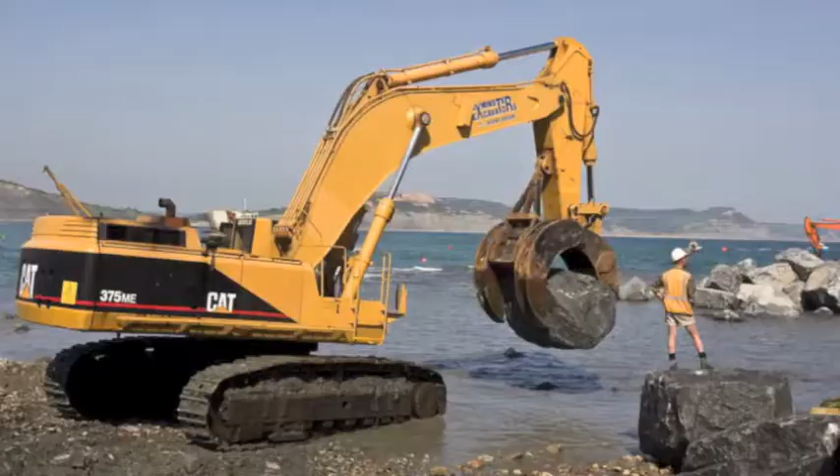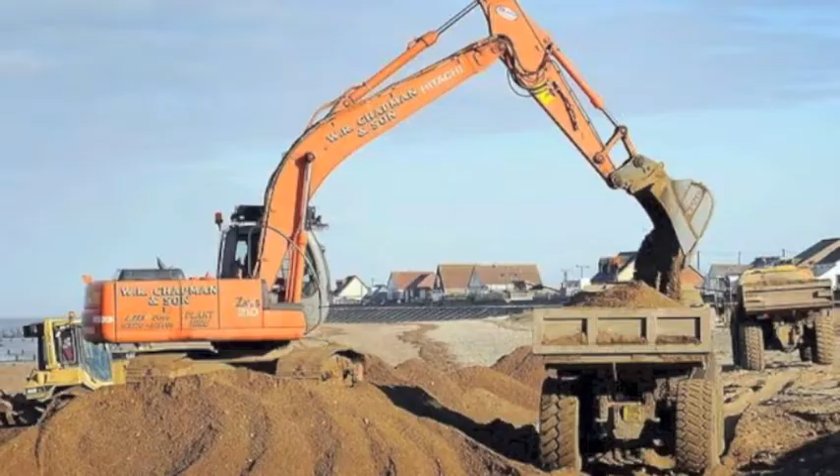Hello, we are Coastal Redevelopment Solutions, and this is our design concept video for the redevelopment of the Tropicana outdoor Lido. This video will look at what solution has been proposed, why this is needed, and how it is going to be accomplished. CRS is comprised of 6 engineers, 3 mechanical and 3 civil.

Together, we have over 3 years of industrial experience and over 20 years of academic study. The team is led by William Holloway, who is the chairman, Joe Driver, who is Vice Chair, George Wright, Finance Manager, Broden Yaxley, Aquatic Specialist, Benjamin Lomax, the Environmental Consultant, and Charles Sayer, Public Relations.

CRS provides a comprehensive design and project management service for coastal redevelopments. Our core value as a company is to provide innovative solutions to complex problems while maintaining an eco-friendly ethos. Through the establishment of strong relationships with clients and the use of our technical knowledge, CRS delivers design solutions which satisfy all project requirements. The Tropicana is located in the town of Weston-super-Mare, situated in the southwest of England.

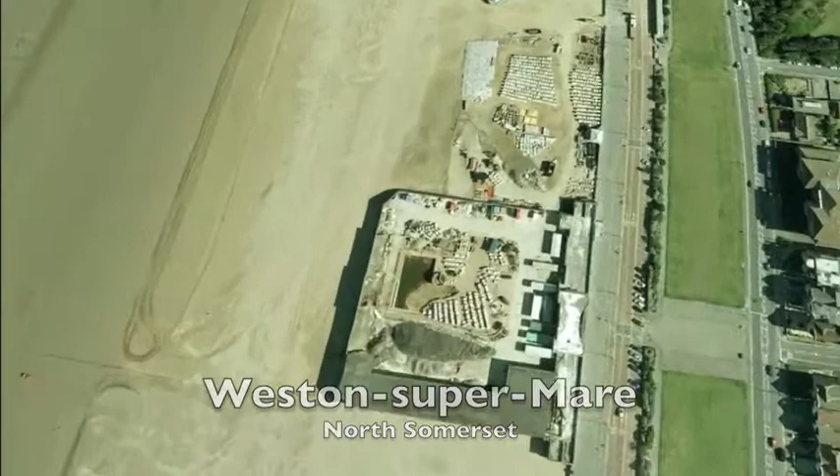The area has excellent transport links, being just off the M5 south of Bristol. Weston is a famous seaside resort which plays host to a range of events such as T4 on the beach, the Motocross Enduro, and the Powerboat Championships.

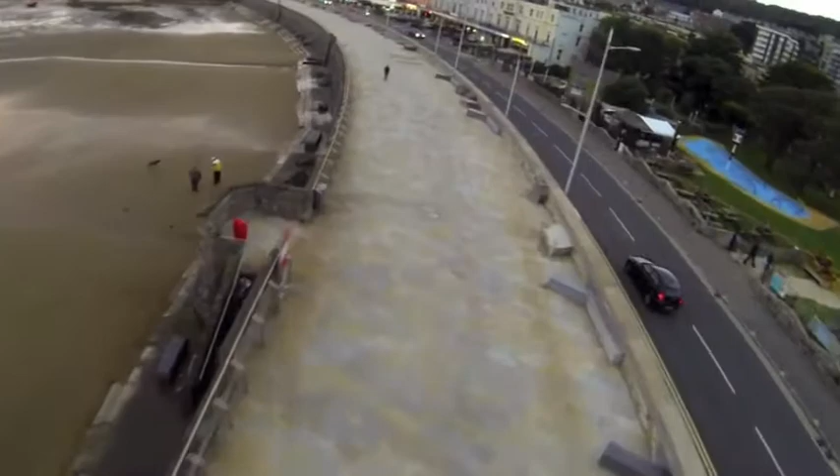In the last 10 years, Weston Seafront has undergone major redevelopment. This encompassed projects such as the £39 million rebuild of the Grand Pier after it was burnt down in 2008. The redevelopment of Knightstone Island Apartments, along with the new Children's Adventure Water Park area.

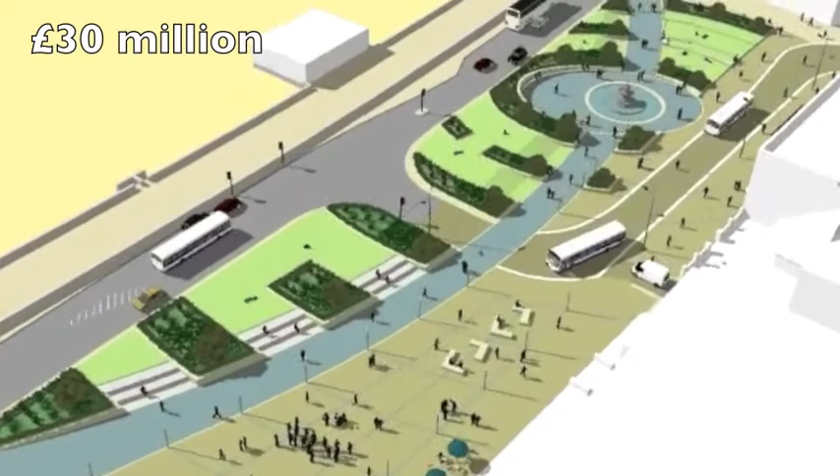The whole of the promenade has been renewed due to the threats of flooding. This £30 million project has refreshed the aesthetics of Weston and has promoted future redevelopment, such as the proposed Dolphin Square shopping area.

Due to the amount of money which has been invested in Weston, we believe that this is the perfect time for the Tropicana to be considered as a viable redevelopment project. There is strong support from the local community, with over 3,000 signatures, as well as a general consensus that something needs to be done. So what do the stakeholders say?

From the Council's perspective, the Tropicana needs to be developed. There have been previous attempts to regenerate the site, but none have been feasible due to the complexity of the proposed designs. The Tropicana was planned to be demolished in 2011, but fell through due to the objection from the people of Weston and surrounding areas.

Yes, I remember when I used to take the children there, and it's a great shame it's not being used anymore. As a shop owner, the increased number of people visiting Weston would really benefit my business.

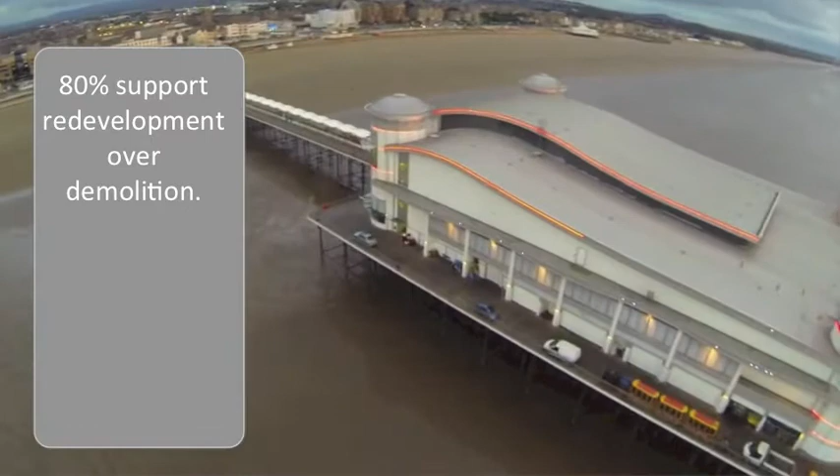A questionnaire was also undertaken. The response was generally positive, with 80% supporting the redevelopment over demolition. It is therefore clear that there is a need and a want for the Tropicana to be redeveloped, and we at CRS have the capability to deliver.

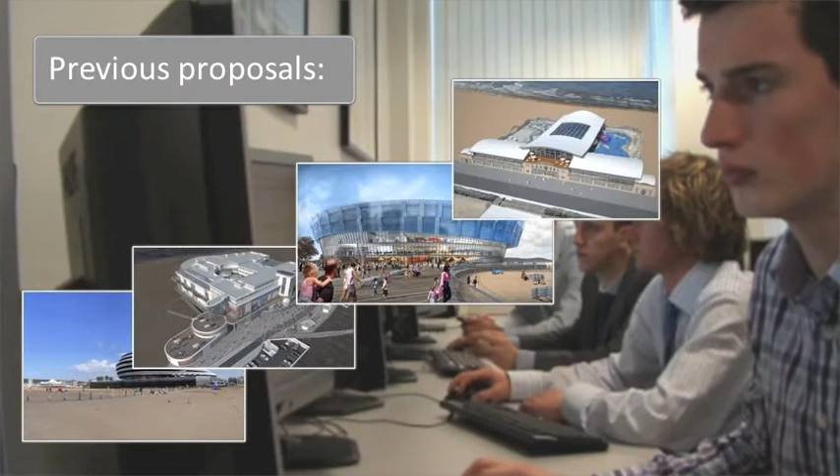Before we chose our final design, previous proposals were evaluated to establish why they were unsuccessful. It was found that the designs were far too complex and did not take into account fundamental stakeholder requirements. The plans were unfeasible on both financial and practical levels. This therefore called for a more simplistic design.

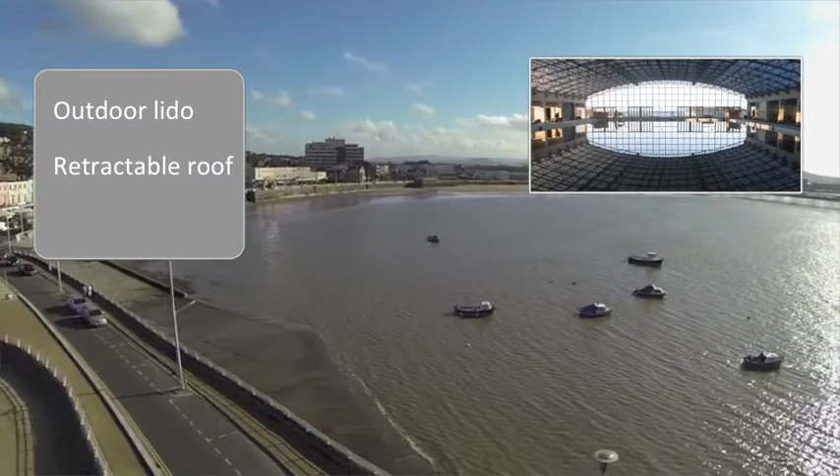The 2 main deliverables identified were to construct an outdoor Lido as it once was, but to incorporate a retractable roof to allow it to be used all year round. From a business perspective, this would allow constant trade on an annual basis, as opposed to the seasonal income of an open-air pool.

Our proposal is incorporated within the existing Tropicana footprint, and has been designed to retain existing features such as the architecture at the front of the premises.

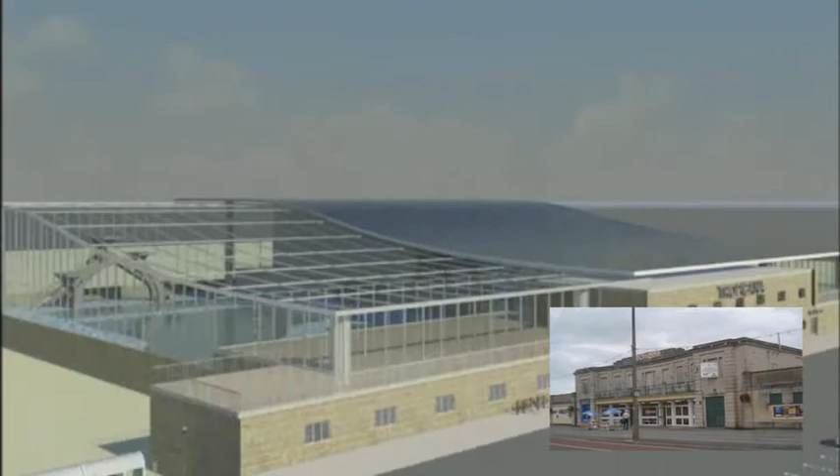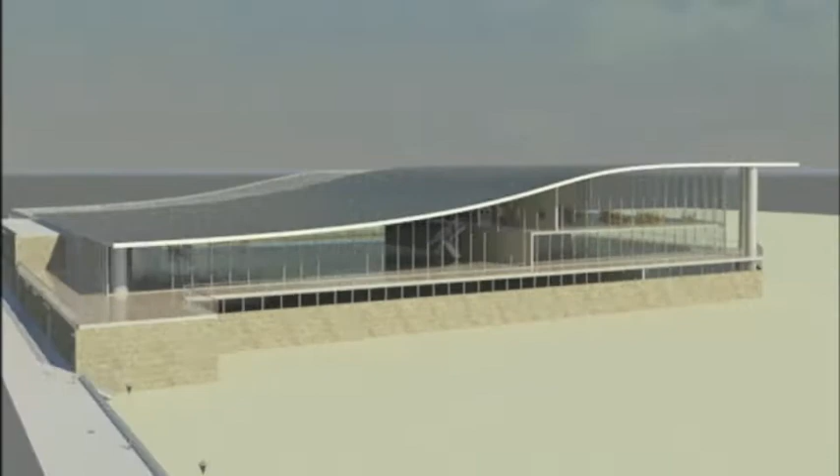Our design is eco-friendly, incorporating extensive solar panel coverage, providing sufficient power to the building services. Additional power and heating for the building and pool is supplied by a CHP plant located in the southeast corner.

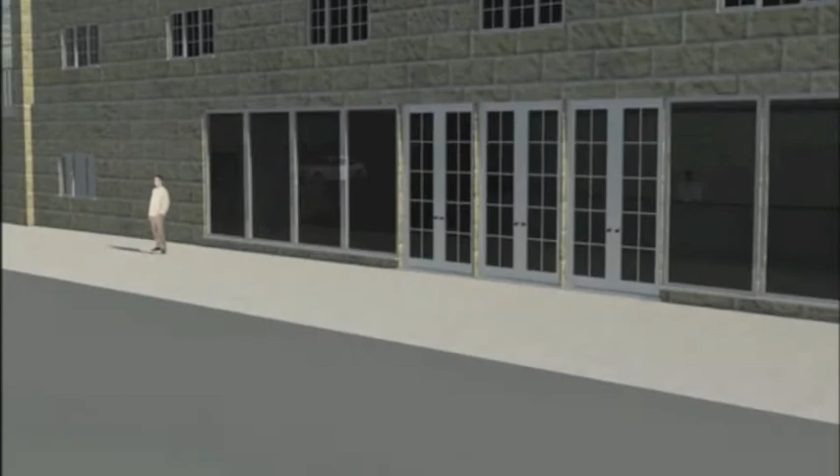Space is provided for retail outlets located at the front of the building. This generates additional income and services the needs of beachgoers by providing toilet facilities.

A bright and open reception splits the building into wet and dry areas. Excellent changing facilities are provided which open out into the pool area.

Here, a 25-metre 10-lane pool and a FINA standard diving pool are located. The style of the original Art Deco diving board has been emulated in our design. Currently, the closest FINA standard diving board is over 100 miles away, in Plymouth and Southampton.

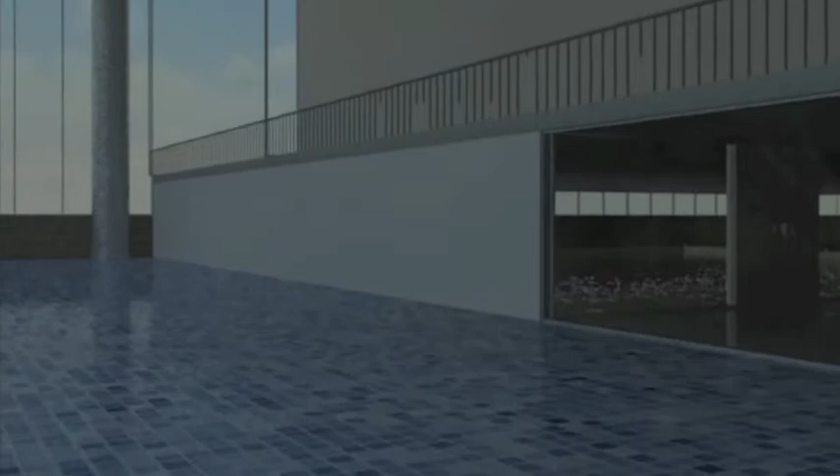The pool provides activities for all ages, such as lessons and fitness classes, as well as plenty of fun. Glass has been used to give an aesthetically pleasing look, while the roof over the fun pool will be retractable, allowing fresh air into the building.

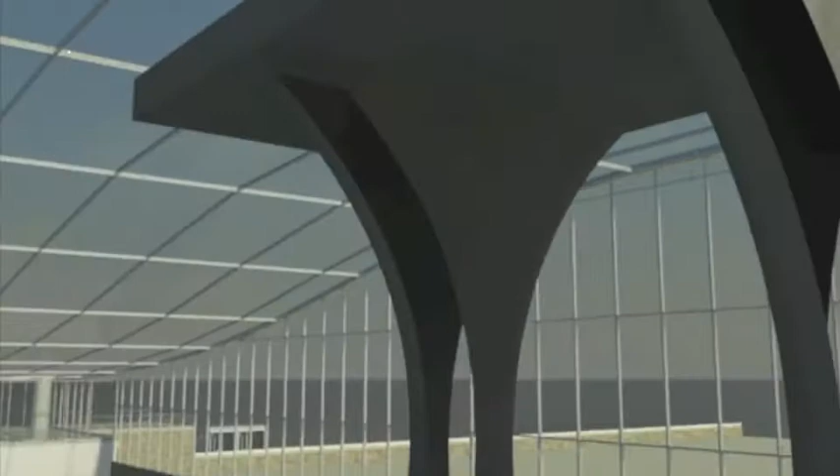Diving clubs will relish the chance to use the state-of-the-art diving centre, and the internationally accredited boards will allow both national and international competitions to be held at the Tropicana. These high-profile events will attract substantial levels of media attention, which in turn will increase the facility's profile and draw in new clients.

As we move into the dry side of the building, there is space provided for further sport and fitness facilities in the form of a fitness suite and luxury spa. A splash cafe will provide drinks and snacks for all users.

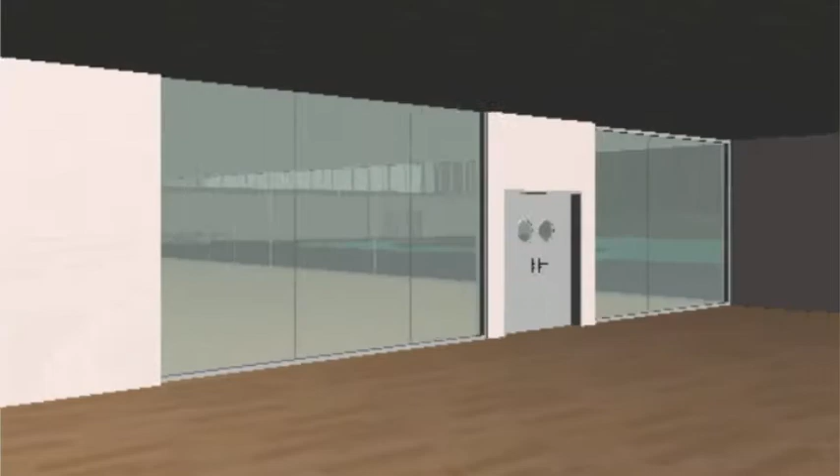A multi-lane bowling alley is found at the rear of the building. This has a bar, food and entertainment facilities to cater to all needs. Currently, there is no bowling alley in Weston as it was recently demolished. This popular activity will provide an additional revenue stream to boost overall income.

Here you can see rear access to the shops, which also act as multiple fire escapes. Staff offices and administration rooms are found behind reception and are only accessible via swipe card access.

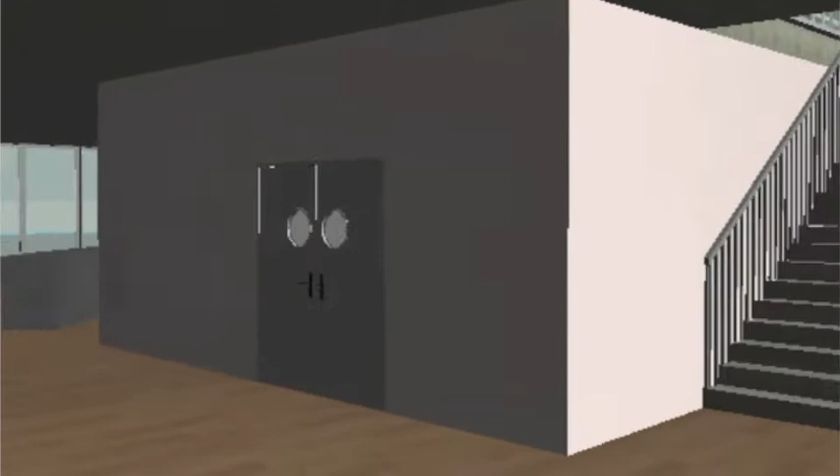As we move upstairs, a viewing platform is located on the balcony, providing grandstand seating for up to 250 people. This overlooks the pool and diving board.

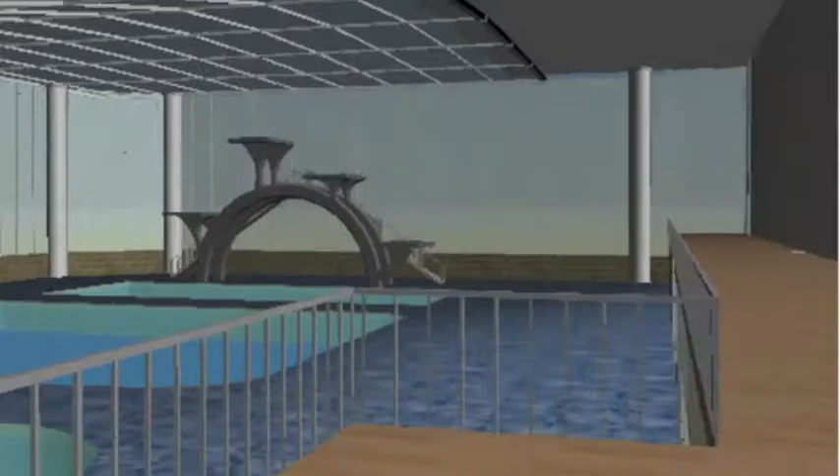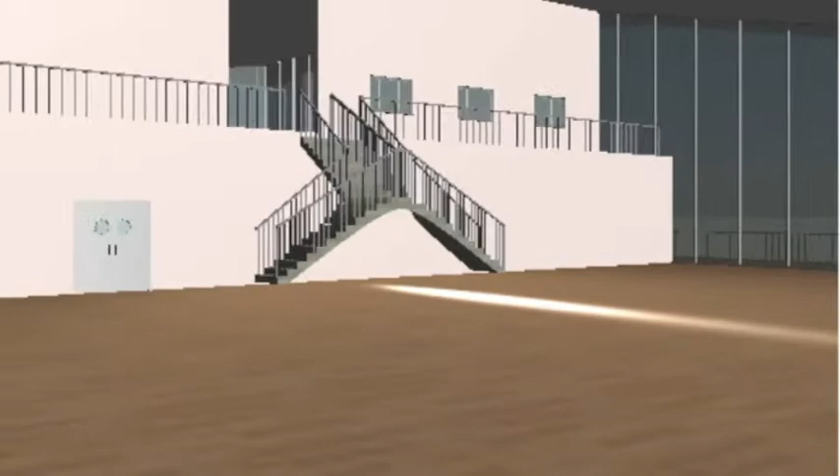Towards the rear of the building, conference, teaching and exhibition facilities are provided for private hire and community events. These areas allow community integration between a variety of interested parties, such as schools, colleges, local groups, as well as outside organisations. Fine dining and quality food will be served on the third floor, Sea View restaurant.

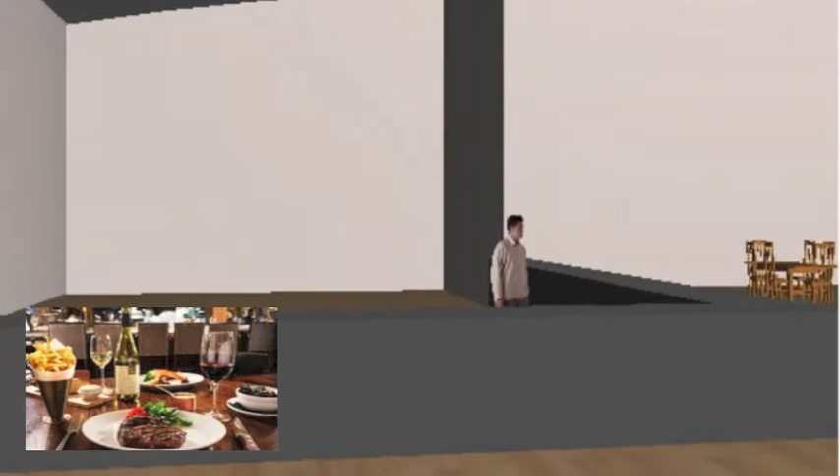Stunning views across Weston Bay looking out towards Wales will complement the design and innovation of the Tropicana.

CRS has developed a project execution plan which highlights various management strategies to aid the finalisation of the detailed design report and the marketing video. With management plans in place and a wealth of experience in complex design projects, CRS will be able to deliver.

The design fees stand at £110,000. This incorporates project management fees at £130 per hour, engineering design costs at £95 per hour, and administration tasks at £60 per hour.

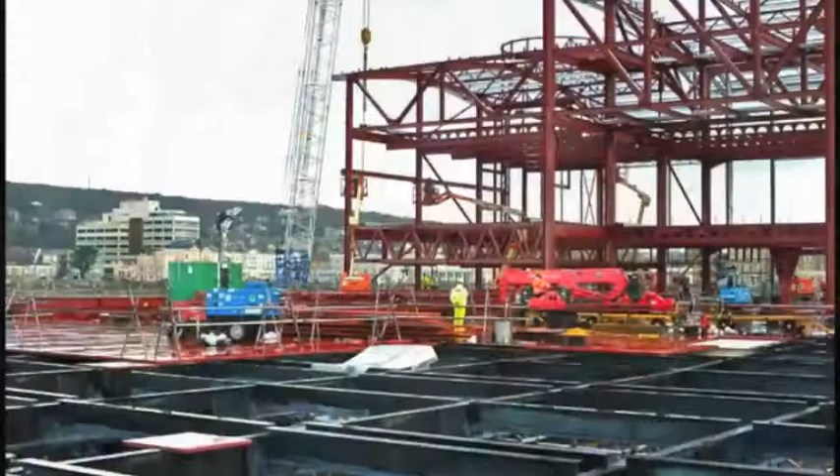The initial total cost of the building has been calculated at £13.2 million. With the addition of a risk budget of £1.9 million and total consultant fees of just under £600,000, the total cost of the entire project comes to £15.7 million.

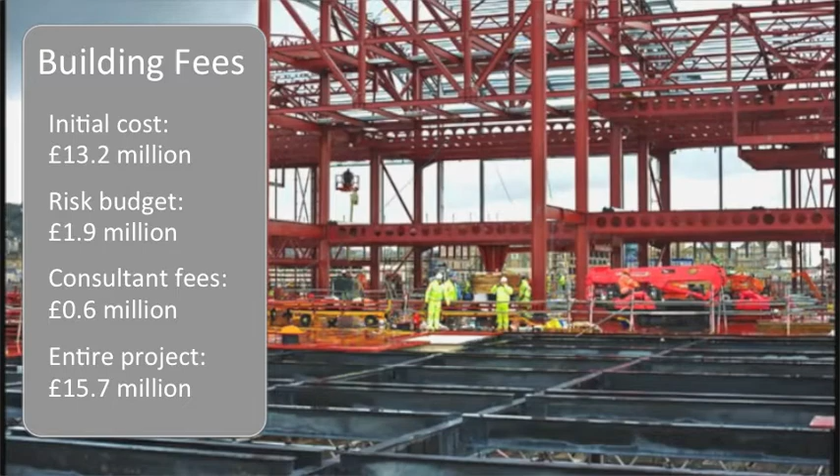Various funding options have been found, which are a mixture of private and public. These include the Coastal Communities Fund, the National Lottery Improvement Fund, and the Community Sport Activation Fund.

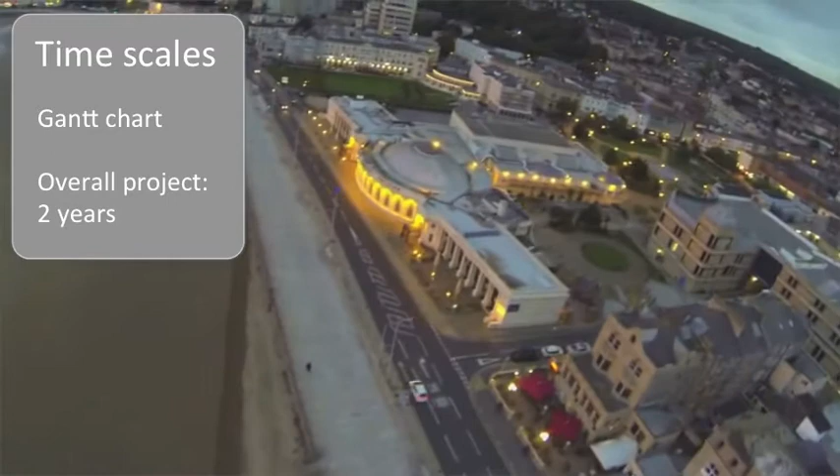A detailed Gantt chart has been constructed, which isolates key events and milestones for task completion. The overall project timescale has been calculated at 2 years. The outside shell of the building and the retractable roof will be completed between the spring and summer to ensure internal works can be carried out during the winter and the following year.

A detailed risk assessment has been made, which highlights both threats to the project as well as opportunities which could be exploited. Mitigating actions have been incorporated to ensure that critical high-level uncertainties are reduced to an acceptable level.

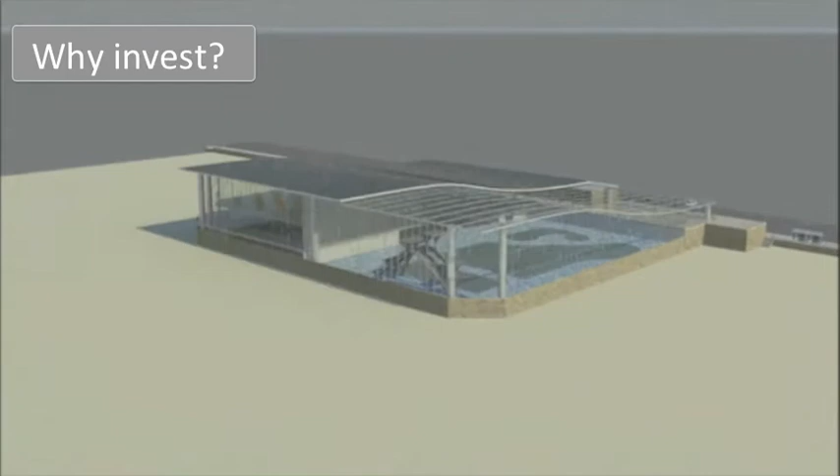So why should you invest in us? As mentioned earlier, there is a huge demand for the redevelopment of the Tropicana. Our design brings back classic features such as the Art Deco diving board while retaining the original frontage of the building. The retractable roof allows for year-round use, and the other facilities provided will make the Tropicana a hub for activities and fun.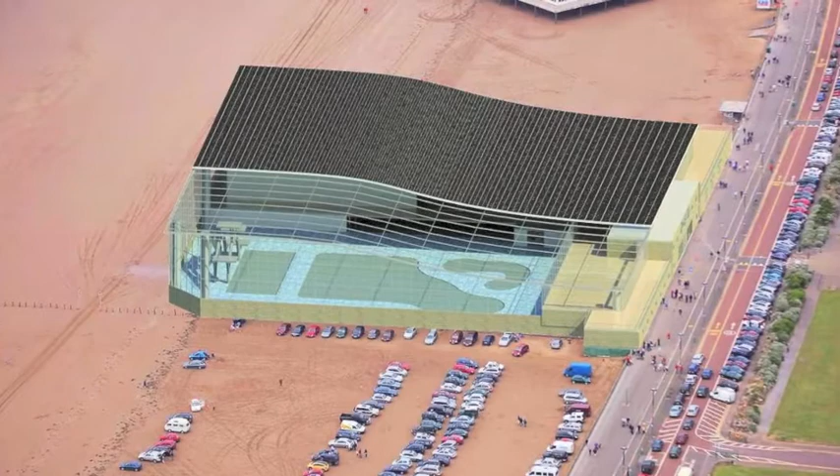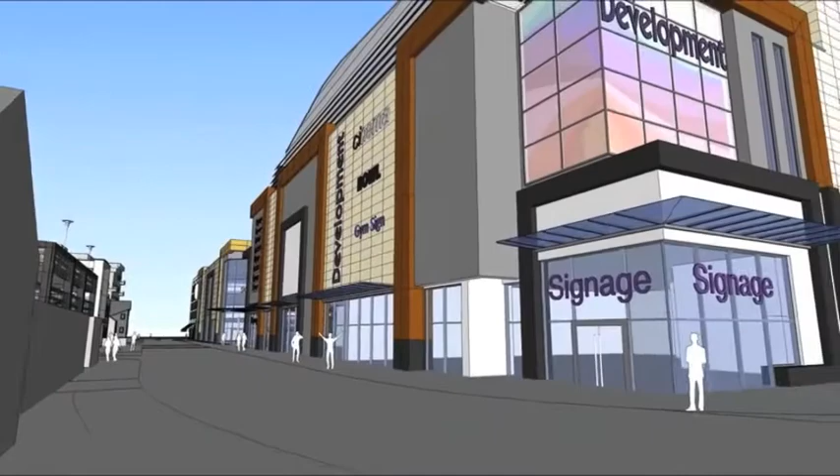By investing in the Tropicana, you're also investing in Weston itself. With over £100 million spent in redevelopment in the past 10 years, and future proposals such as the Dolphin Square shopping complex underway, now is the perfect time to get involved.

With our technical expertise and experience in the coastal redevelopment sector, CRS are 100% committed to making Weston proud and bringing back one of the icons of the town.